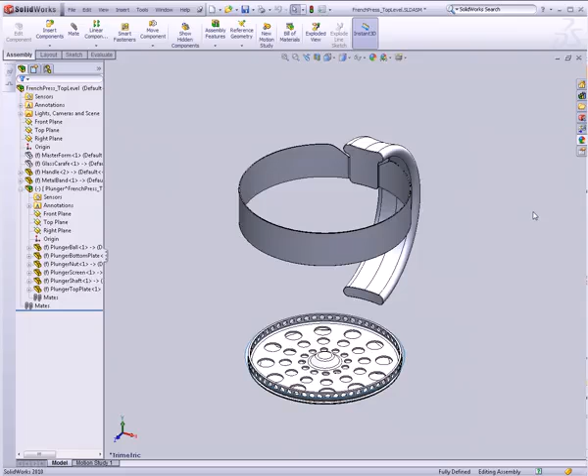The rest of the plunger is going to be really easy. Let's open up the plunger nut part and show the plunger nut body. Zoom in here, go to surfaces, filled surface, and fill in a couple of these surfaces. I don't know if I can do both at once. Looks like it's not going to let me, so I have to do one at a time. Same thing on the bottom.

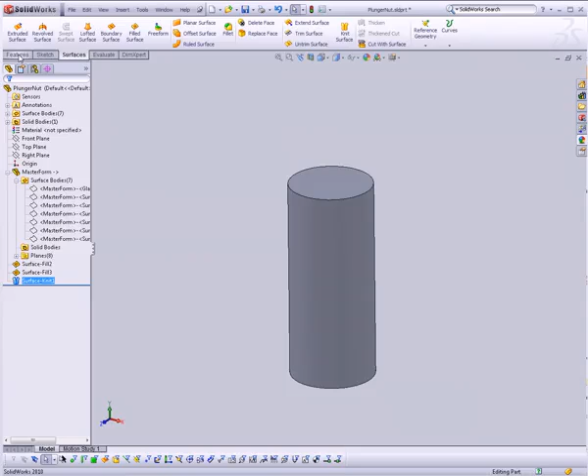Go to knit surface, knit all three surfaces, and then make sure to check try to form solid. Now we have one big solid block. I can go to my features, under the fillet tool, drop down, and

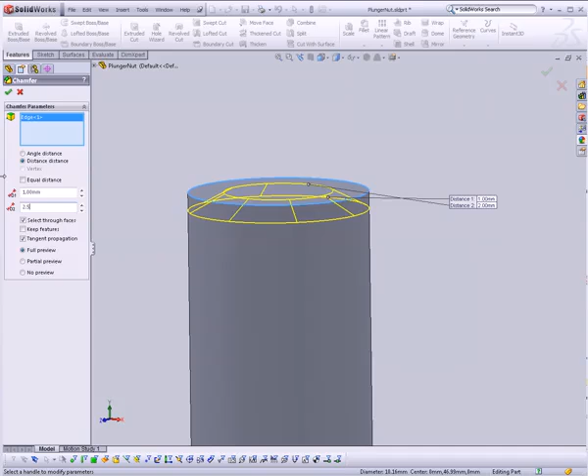there's a chamfer tool I can use instead. I prefer, instead of angle distance, I choose distance. Choose this top edge, and set this to maybe 1 and 2. That'll make it nice and easy to control my chamfer to get it to look exactly the way I want. Maybe this is 2.5 and this is 2. That looks a little bit better.

Click OK, and now we'll round this thing off with like 1mm fillets. Actually, I think 1mm is probably too big. We'll do a 0.5 millimeter. Perfect, that will be my nut.

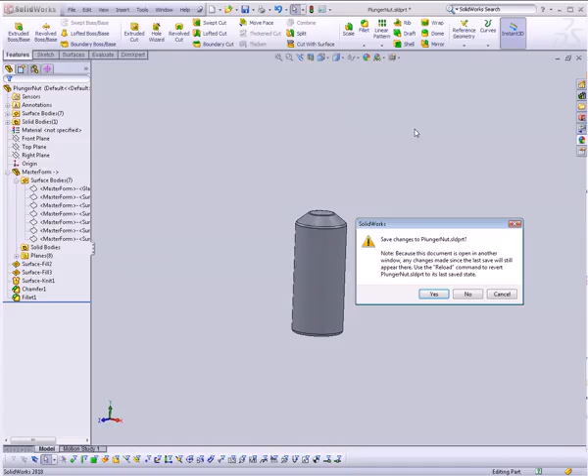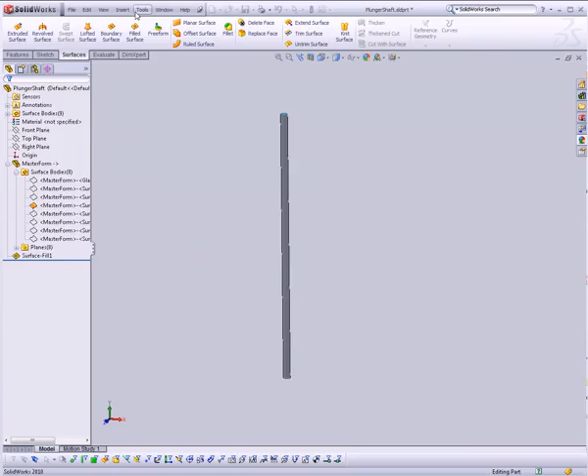We'll just pretend that this chops the thing in half. Last, we need a shaft. Let's open up our shaft. All we have to do to this one is just close it off, I think, at least for now. So we'll do the same thing: go surfaces, filled surface, get that one, get that one, and then knit them all together. Try to form solid. Close it up.

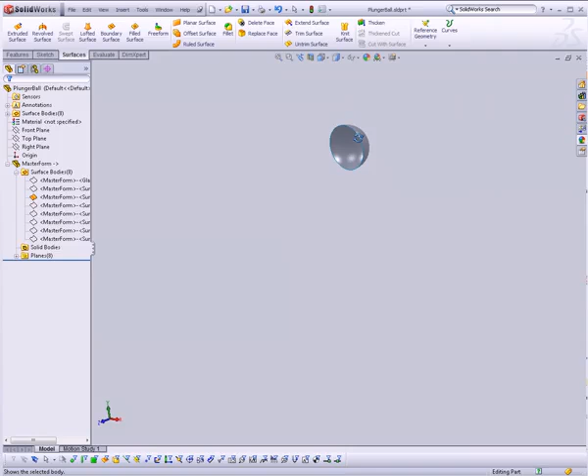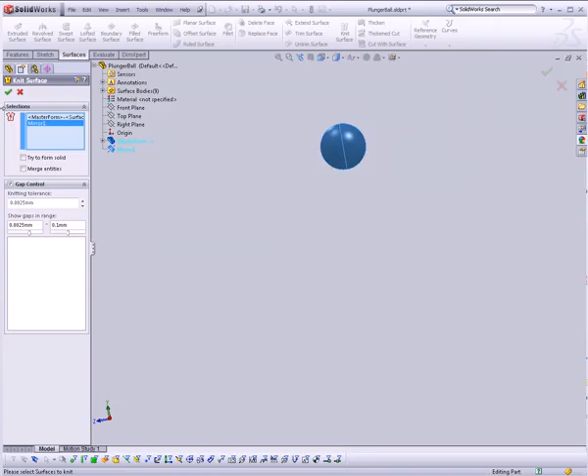And we need our ball on the top. All I'm going to do for the ball is show that surface. I'll use my front plane to mirror that ball body across. There we go. Now when I do my knit operation, under surfaces, knit, solid, boom.

Do we lack anything else? I think that's it for our plunger. And now I think pretty much all we have left is the lid.

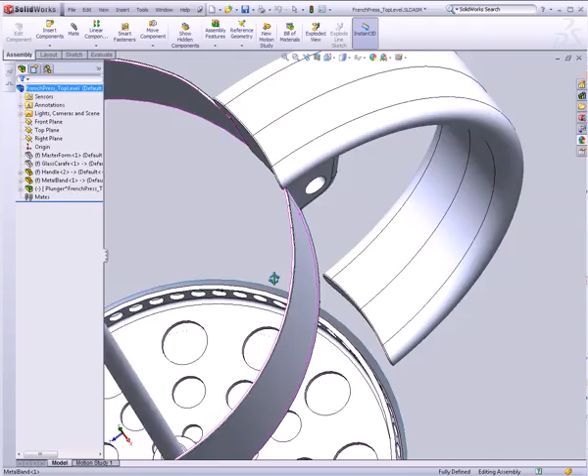Now since this was a quick video, I want to go ahead and point something out. I messed something up in the master model. I made this metal band not go far enough in. It needs to be a little bit tighter there. So why don't we go ahead and make that change.

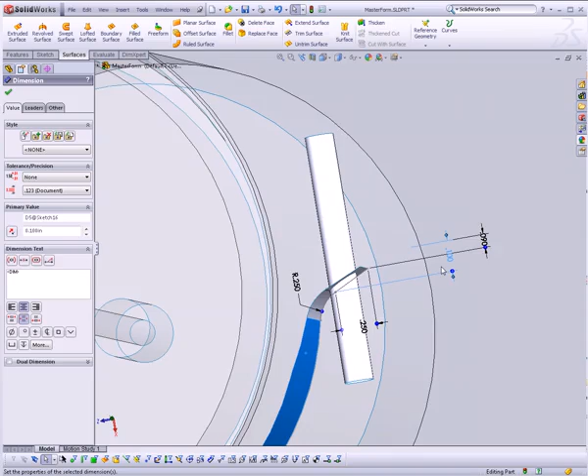Let's go open the master form part, and I'm just going to edit the original sketch that makes this up. If I click on this surface, you see it shows me the dimensions from the original sketch, making it really easy to change. So I'm just going to change this on the fly right here. Let's make this 0.1 inches, so this is nice and tight. And I'll make this 0.05.

Now this is not going to update yet. I changed those — why isn't it updated? Because it doesn't automatically update when you change it that way. To update it, you have to click on this rebuild button up here. Click on that, and there we go. That's a little bit better.

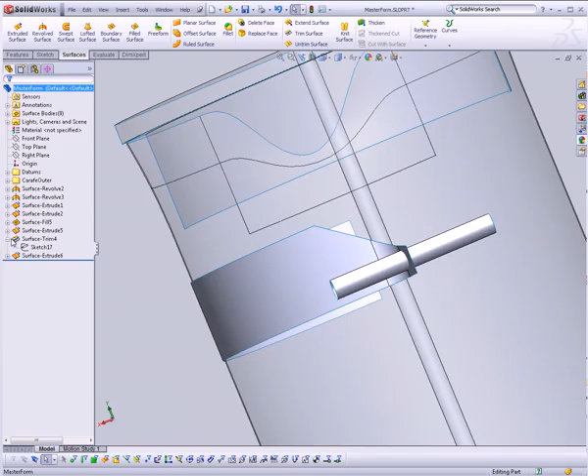Also, this diagonal line is too far out, so I need to change it a little bit. Right now it's 0.75 inches. Let's go into 0.5 inches. Click the update button, and I think that's going to work better for us. Close the document, save it, and everything should just update happily.

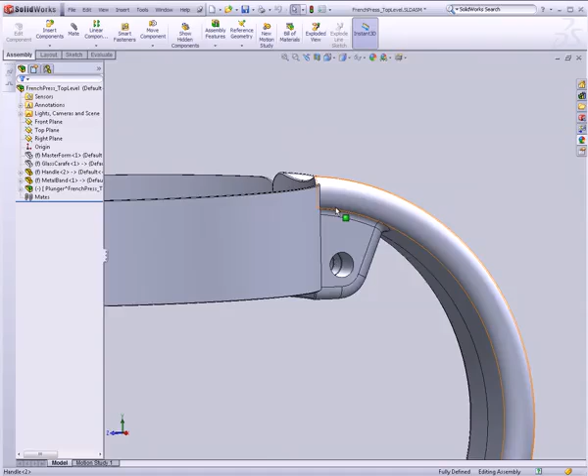Much better, and everybody's happy. The one thing is, it looks like we could also move this face back a little bit further. So we can go to our handle here. I'm going to open that part and go back in time before we put that last fillet on. We already moved this face back a little bit because we moved both of these, but I just want to move this one back now. I want to move it back a little bit more.

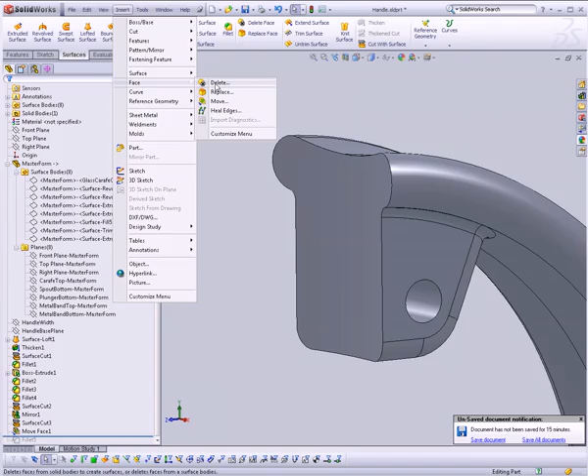So let's go Insert, Face, Move. You can move this face back, flip direction, and let's move it back by 0.05 inches so we get a good little distance there. 0.03 maybe.

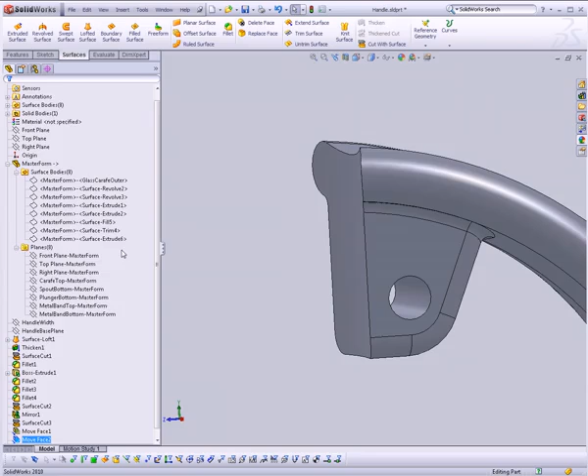I'll just roll back to the future. Close this document. That's a little bit better.

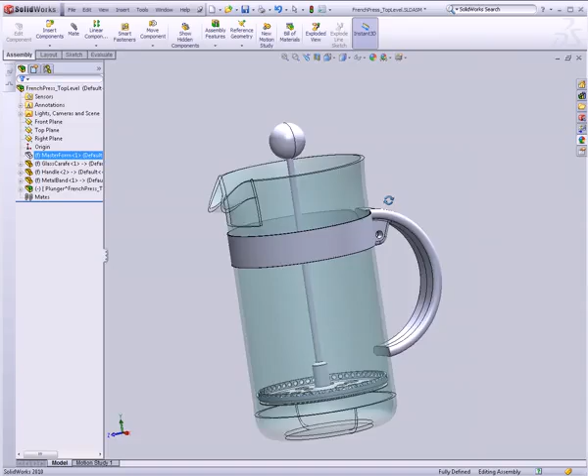Now if we were being really picky, we would add the features where this metal band connects into the handle, but I don't think that's going to matter one bit. Here we are, and I think our French press is coming along. Now all we have to add is the lid. Home stretch.